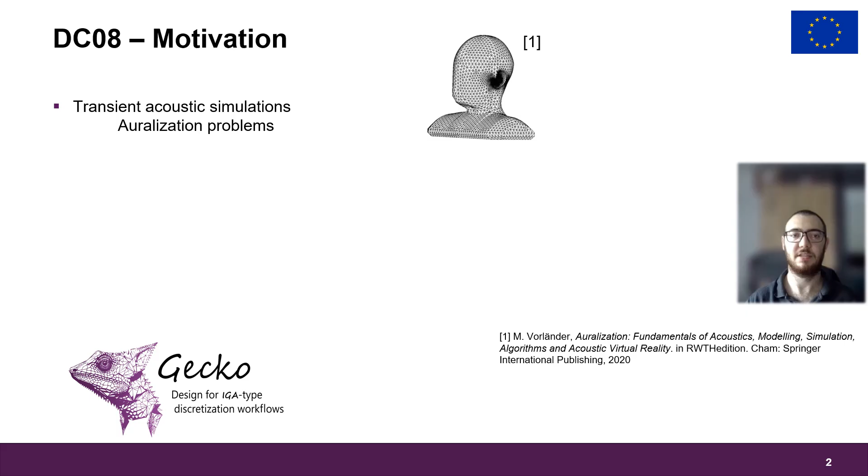In this video, I will try to summarize my PhD topic. So, let's start with the motivation behind my PhD. Transient acoustic simulations are used in many different areas, such as auralization problems where human hearing is simulated, or it can be used to assess the noise emitted from a moving vehicle, or more broadly, it is used to analyze sounds emitted from time-varying sources.

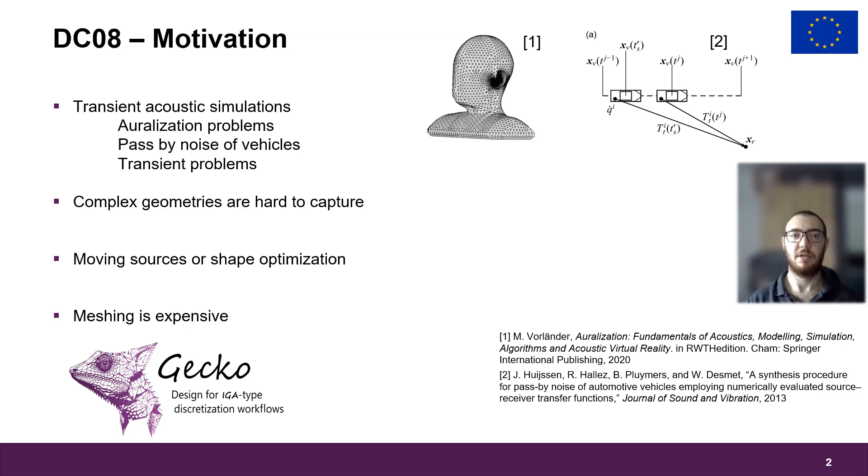In those applications, geometries are generally complex and require much smaller mesh size to capture all the details. This is especially important since the reflection from those complex surfaces can change the results drastically. Moreover, these complex geometries can be in motion or may be used in shape optimization problems. Both of these cases require recalculating the mesh, which is very expensive and can take the most time for an analysis.

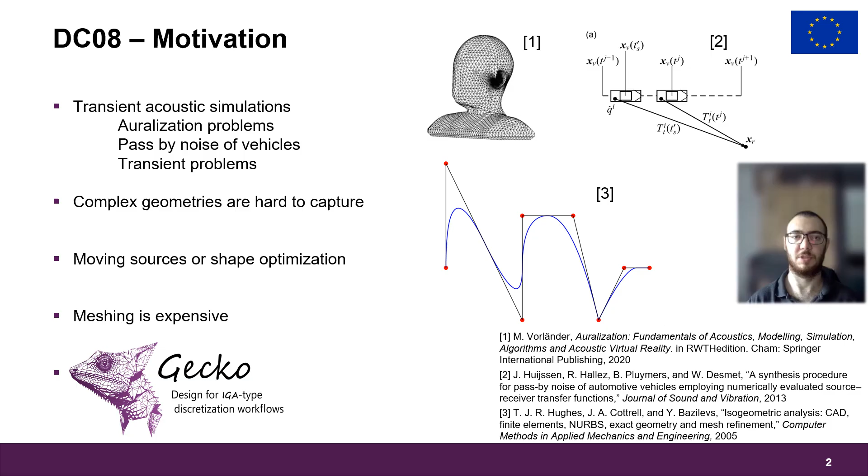One solution is to use isogeometric analysis or IGA, which is the main aim of our doctoral network. The main idea behind IGA is to use the CAD description of geometries as shape functions in element type methods, such that the CAD geometry can be used in the element methods without meshing the geometry. With this motivation in mind, let's look at my objectives.

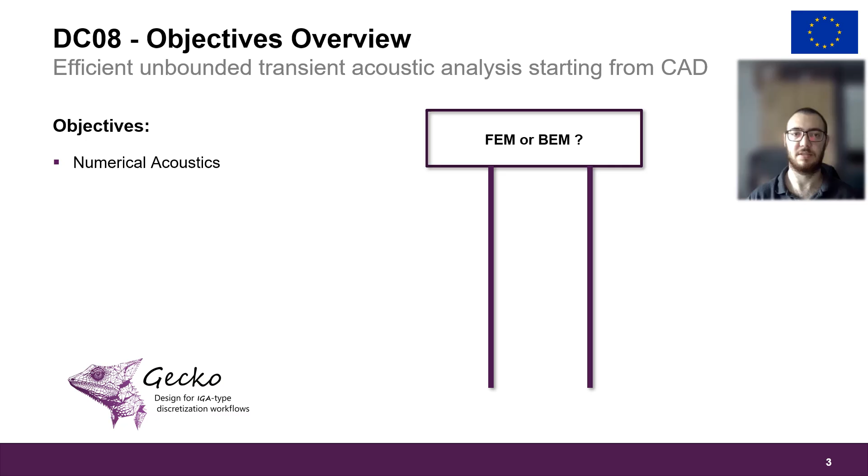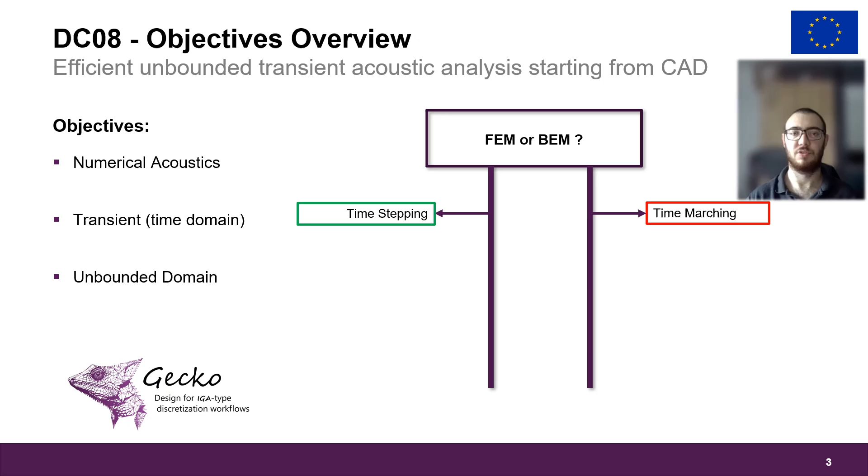First, I would need to do numerical acoustic simulations. There are two main choices for that, finite element method and boundary element method. Each has their own advantages and disadvantages. Next, I need to conduct time domain simulations. FEM is slightly better for that task since time stepping is a less expensive option for the solution. However, to describe unbounded domains, FEM needs special boundary condition treatments, while for BEM it is already included in the formulation.

Next, we need to apply model order reduction to handle the industrial scale examples. For FEM, this results in significantly smaller matrices, however, they generally lose their sparseness property. For BEM matrices, size reduction is smaller, but they allow for reduction in time direction, so combining this reduction with the already smaller system size using BEM might be more beneficial.

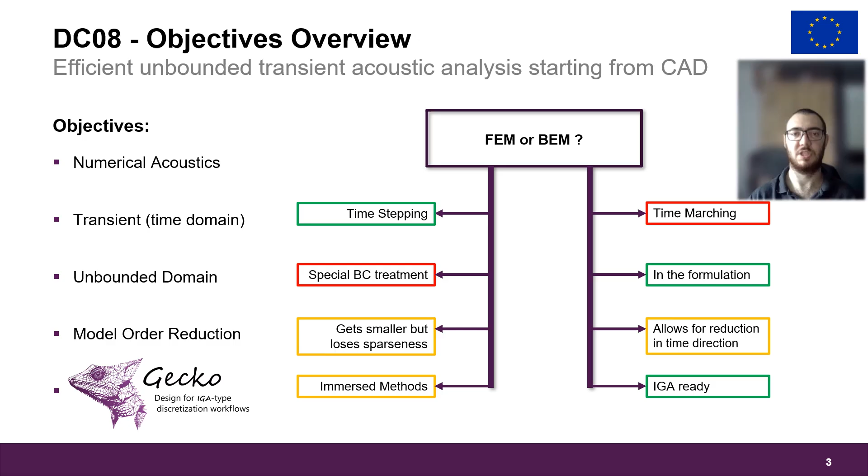Lastly, IGA. For FEM, direct application of IGA is harder, so it is better to apply it through other techniques such as immersed methods. BEM is more IGA ready, but it has its own problems. For both of these cases, applying IGA on top of already complicated methods requires good justification. For that, we can look at the advantages of IGA. Since other doctoral candidates gave general advantages of IGA, I want to focus on specific advantages for my case.

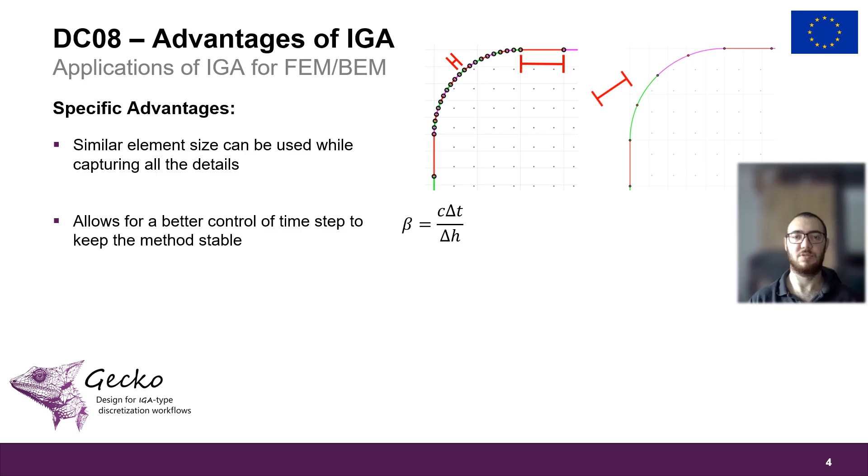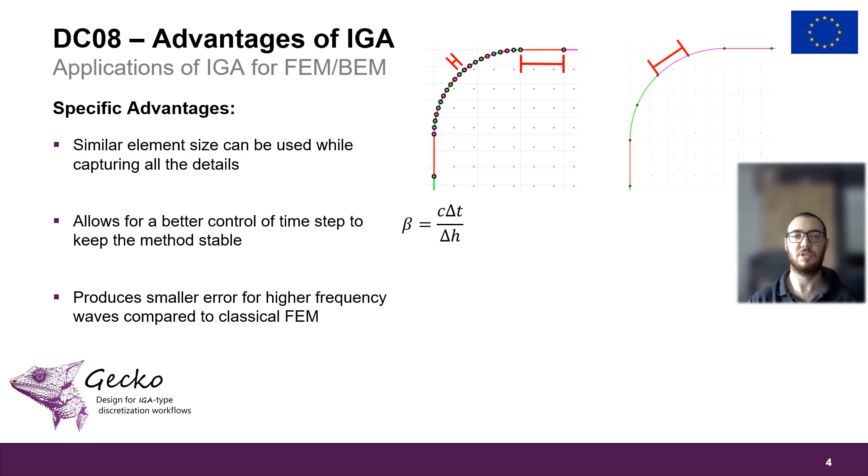First, it allows us to use similar sized elements while capturing the same amount of detail, as shown in the sketch. This gives us more control over the system size and the accuracy of our solution. This also gives us more control on the stability, since elements with different sizes can cause instability for the time domain solution. Moreover, time domain simulation is affected by high frequency solutions, and IGA generally performs better for high frequency solutions than the classical finite element method, due to higher continuity between the elements.

Since those advantages seem to apply to both FEM and BEM, both methods have their advantages for different problems. So I would like to develop both methods in parallel so that I can use the more advantageous method for the problem at hand. However, my more recent focus is on the shifted boundary method for finite element, where I am in collaboration with doctoral candidate 1.